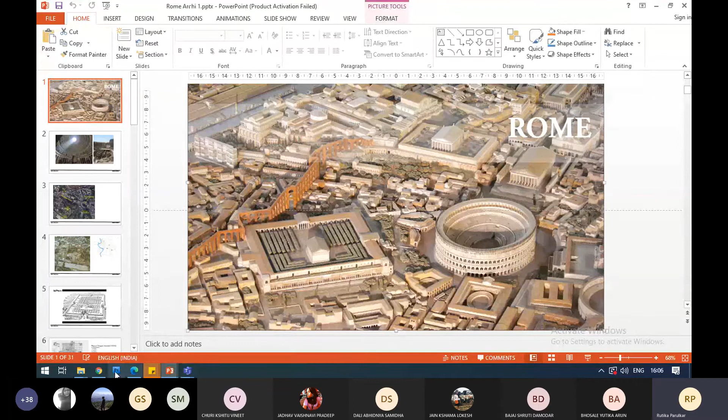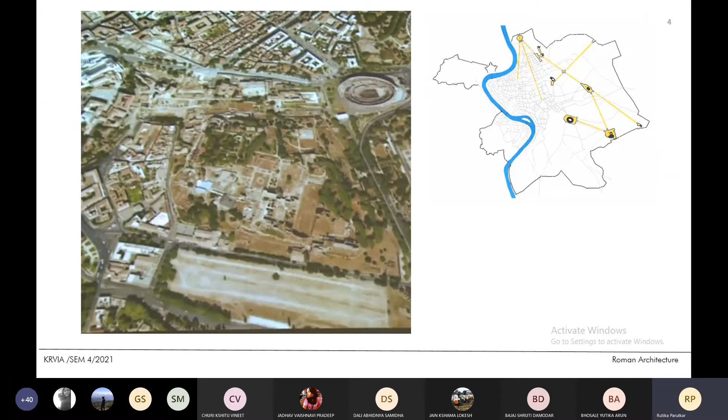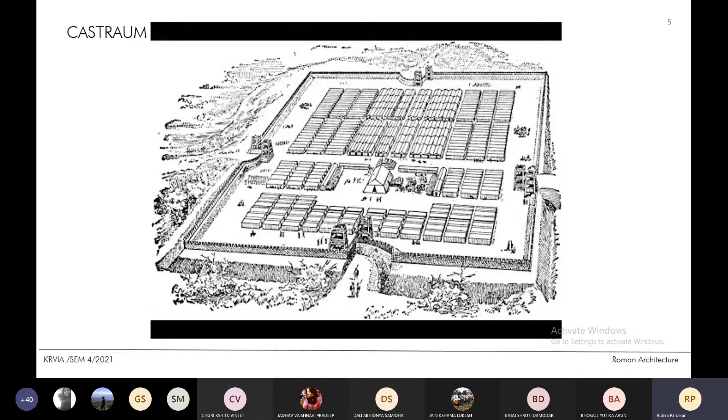So this is what we started last time with Rome. When you say Roman architecture, talk about Rome in general, these are the two monuments that come in front of us. Then we talked about how differently Rome was planned, and these different icons sitting very individually but at the same time syncing with the environment and having their own mark. Plus, one important aspect of the city of Rome is that it is situated on the banks of the Tiber River. Then, the way Roman city planning was, they always had this reference of the military camp they built, called the castrum, which is one of the important aspects—a typical Roman grid plan, and its different aspects.

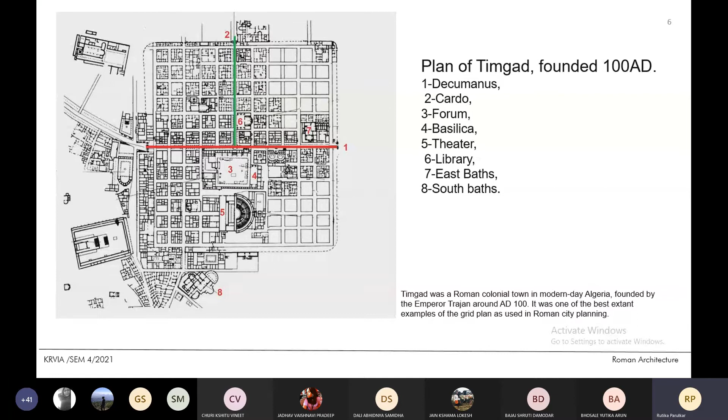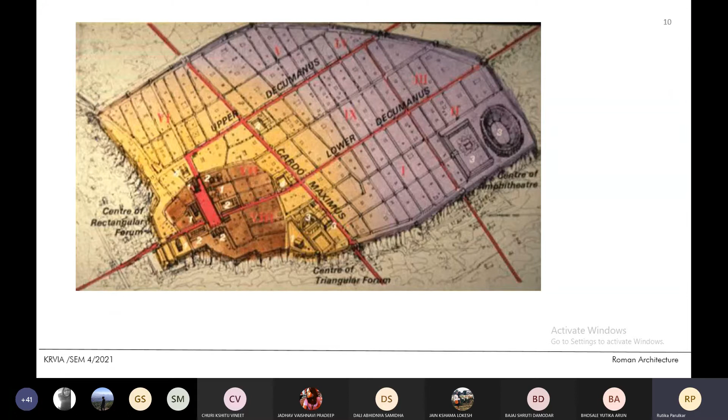Especially the north-south and east-west streets, which are one of the important streets, the Decumanus and the Cardo. Then we saw different examples like Timgad. We spoke about the Roman walls built in the city of Pompeii, and how Pompeii was one of the very important cities, which also showcased the way of life, still preserved. But the only thing that happened with it was the volcanic eruption, and that's how the whole city was buried. Then we also spoke about a very important port on the mouth of the river, that is Ostia.

Ostia had a very different planning aspect, and it reflected the luxurious way of living, because it was fully occupied by traders and businessmen there. Then, we know that Rome was built on these 7 hills, and there are different buildings, or rather forums, built between these 7 hills. Even for a particular forum, one of the hills was scooped out, and a whole way was made to access that forum. Then, the myth of the founding of Rome.

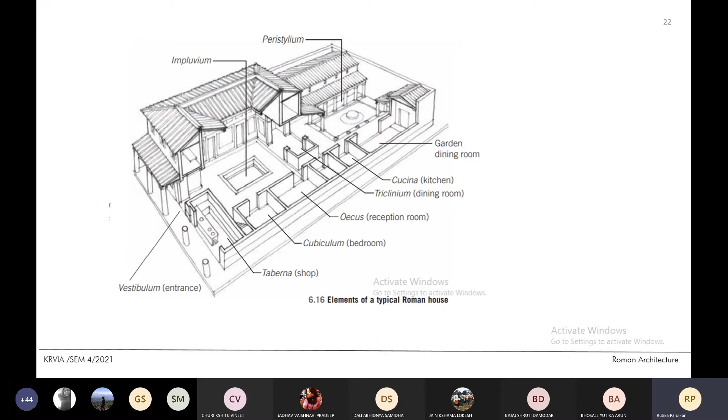We discussed the Iron Age village on the hill and how it was constructed, the typical residential fabric of the city, and how Roman houses were blown up in scale compared to Greek houses because of different aspects of social life. We also spoke about Augustus, one of the first emperors, and the different Vitruvian design aspects of Firmitas, Utilitas, and Venustas, which are important concepts discussed in the architecture of this antiquity.

Taking this forward, one important aspect after discussing city planning is why these monuments were so ostentatious and powerful that they were able to build them. Primarily, they had all the paraphernalia to build a building, but the question was how to take it to another scale, another level. So the Romans worked on the technology front, the engineering front, and experimented with materials. That's how there was a difference in perception of space and the built environment between Greek and Roman architects.

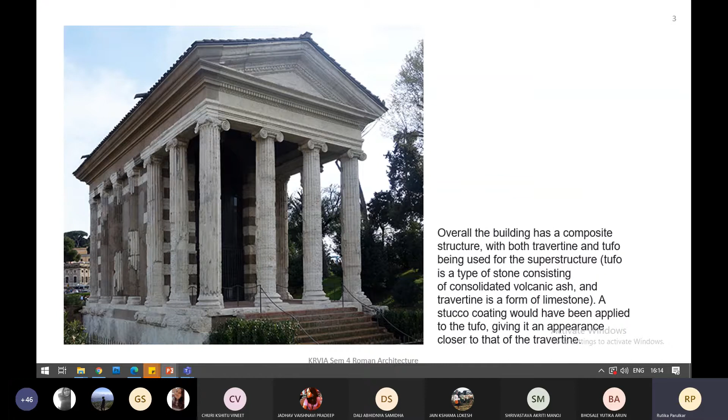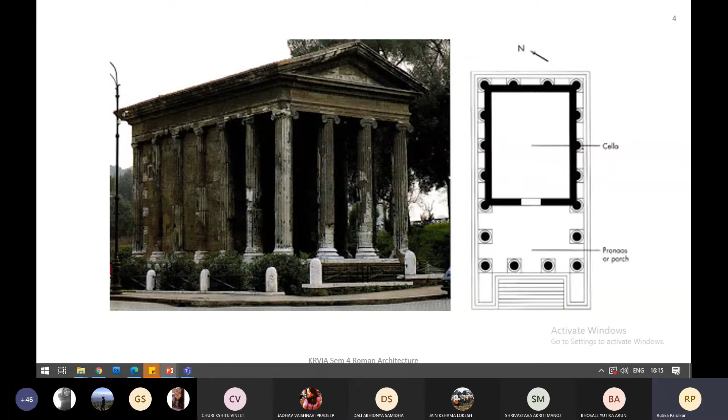This was again a very typical rectangular plan with a series of columns, a wall, and a porch - nothing much different from the Greek temples, and of course you can see the Ionic columns were used differently.

So there were these freestanding columns, then the engaged, or what we call attached columns, and a very humble kind of structure. We're talking about this because it's one of the well preserved structures, one of the very few well preserved structures of traditional Roman architecture. As I said, the monuments in Rome are so layered, with the whole Renaissance, then even Romanesque layers of different eras already on Rome. Once you start studying it, you have to delayer all this to kind of reach this.

So that was one of the starting points of when the Romans started using concrete, and they started experimenting with it.

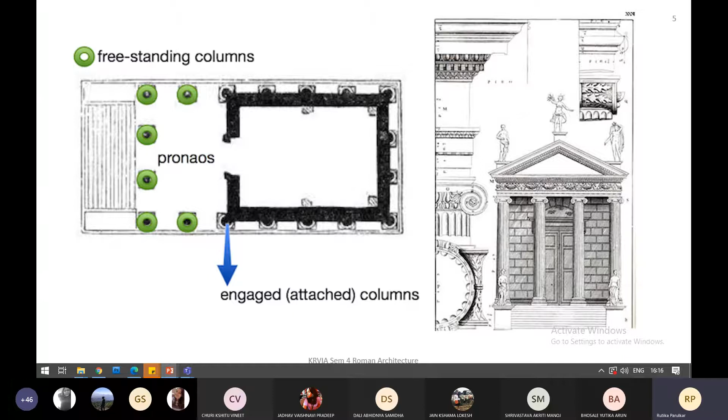Then another was the Temple of Fortuna, which I think is a very interesting temple. Rather than the tectonic aspect, of course we can see the concrete walls. So even here the use of concrete started a lot, but it has not made much contribution to the tectonic or engineering aspects of Roman architecture.

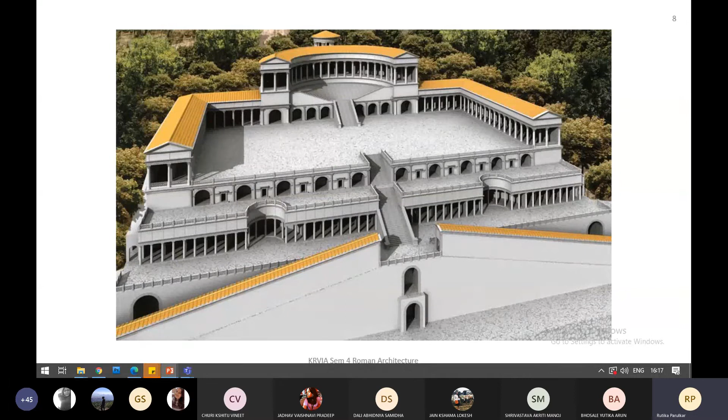But I like this example by the way it responds to the whole setting. I've included it only because I love the way the temple is laid on this heavily sloped land, and the way the terraces are imagined and respond to each other, the colonnades that come up, the flight of stairs that goes up, the scale of the stairs, and the way it reaches the temple as one of the axial points.

So there's a combination of Ionic, Doric and Corinthian columns. I think on the first layer of the terrace you have a series of Corinthian columns, and as you go down, it's more subtle columns used, that is Doric, then Ionic, then Corinthian, something like that. But the way it situates itself over this heavily contoured land, and the way the movement is carved out, is very beautiful.

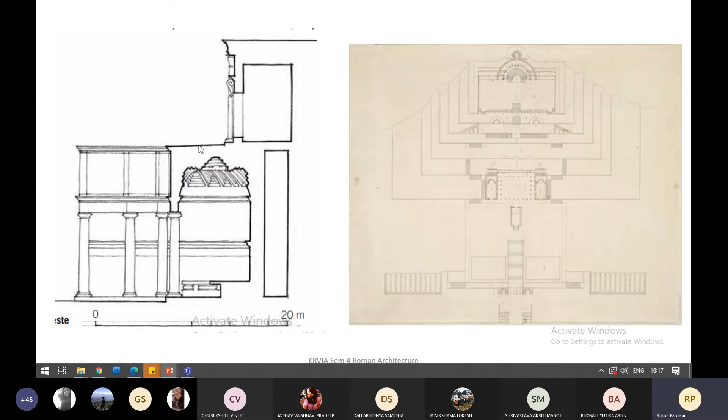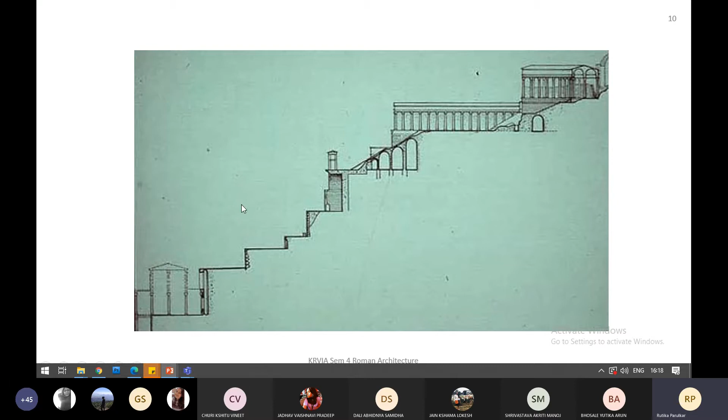This is a part section of it, through one of the terraces, and you can see how the scales and proportions are imagined and matched. This is the typical section of the whole temple, showing how these terraces are formed, and how the structure looks like it belongs to that landscape.

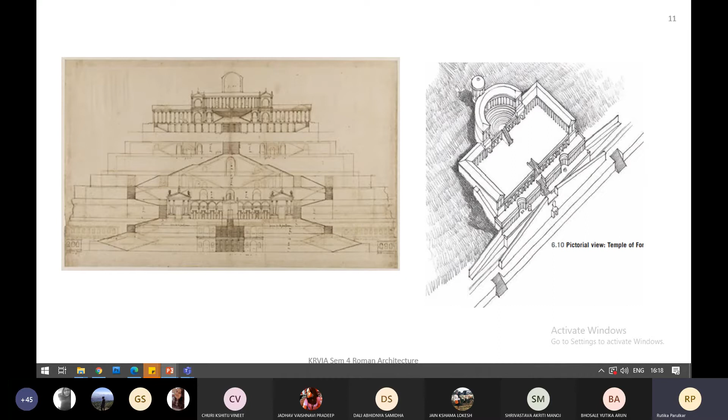That was something really fascinating for me in this. And at the same time, when you see it in elevation, it makes its own mark, its own presence. There's something with these ramps, with the staircase, making not a subtle but a very strong statement. So the way it looks in section and the way it looks in elevation has a very different connotation, and that's what I love about this example, that's why I've included it.

So there are these pointers that I have marked here, and we'll go one by one, which will be helpful for you to study. It's a composite of various natural elements that becomes a liquid mass when mixed with water, and eventually hardens into a very strong substance, much stronger than any of its different ingredients. What are the different elements that Roman concrete is a mixture of? It's a mixture of stone rubble, liquid mortar, composed of lime and pozzolana. So pozzolana is one of the very important materials here that changes the whole game.

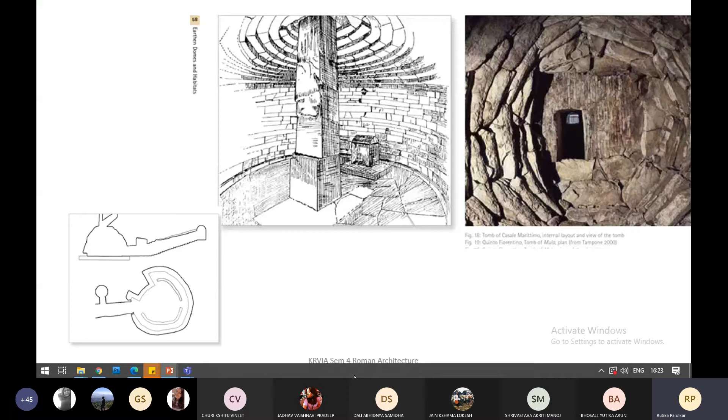So there were these inceptions at the start in which they wanted a departure from the rectangular plans they had. Coming to the different concrete walls we talked about, even when concrete was invented, the only downside of using concrete was that it was not as aesthetic as stone. It never gave the whole textured, visual aesthetic that stone gave.

So what they did was start making different patterns on the concrete when it was wet. Plus, one has to protect concrete from getting moist, or there has to be some kind of layer over it. These were the realizations they had over time, and therefore they developed these different types of wall treatments.

There are three different ways they developed to have different textures on a wall, wherein they had the textures of those stones, which when the concrete is wet and moist, they used to make patterns by those, or make different shapes at the corners of the walls.

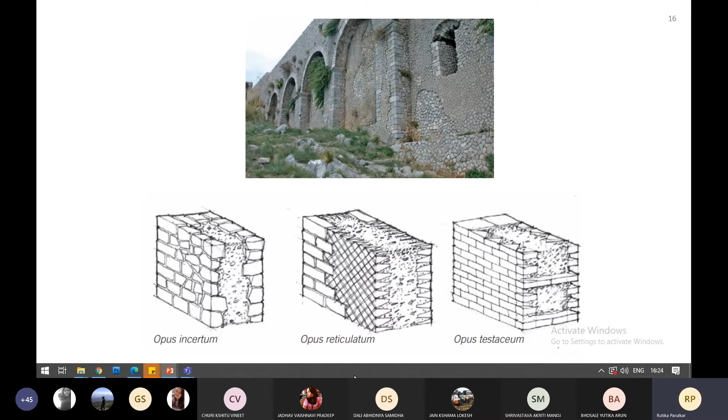If you can see the second option, the reticulatum - here they also realized that the ends of the wall, when the concrete was moist, could be made very sharp by shaping stone patterns into it. It also added support and strength to it. So they started making these smaller changes and tweaks.

After this invention, of course, we know the Pantheon - one of the important buildings and a structural marvel - is all possible because of the invention of concrete. Another important factor was the ruler, the emperors during that time. Hadrian and Trajan were two emperors who were very much interested in the architecture aspect.

There's a whole idea that a lot of buildings that are commissioned, a lot of architecture that is built, are many times an aspect of power, to portray power, to portray identity, and to make one's mark. So it's very important for any commissioned artwork or building to have a patron. Here the patron was Hadrian, and he was very much interested in public and civic architecture. This was one of the important buildings that he commissioned, successfully built through his ambition.

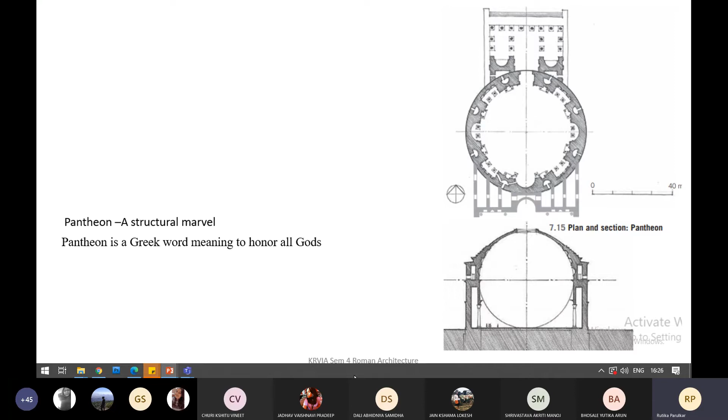And so Pantheon, which is a Greek word, means to honor all the gods. It was a temple wherein there was not the presence of just one god but different gods. This is one of the marvels which is said to be angelic, not human design - this is what Michelangelo said, as we all know. There was this whole trend where historians and artists used to always go back and refer to history and study and document these. So when Michelangelo visited the Pantheon, he was in awe, and this is what he said.

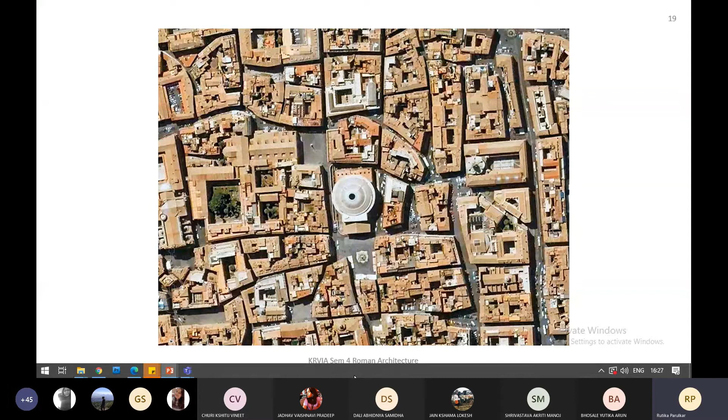This is how the Pantheon sits in the Roman built fabric. The modern day level of the roads is quite up, but if one goes and sees, the plinth and the way the Pantheon sits, it's almost 1 to 2 meters down from the modern height of the road.

One of the biggest achievements they had here was to make a circular plan of this scale. And even the niches that we see here are also one of the realizations where, where there is no load, the material can be removed. So these niches are dual functional, functioning in two ways.

One is because you don't need material there, because the load is not acting there - the material has been scooped out. And second, these niches become spaces where the sculptures of different gods are also kept.

But at the same time, they are positioned in such a way that the oculus at the top of the dome, with respect to the movement of the sun, the way the light falls at different times of day, it actually falls on these niches, on each sculpture of that god. And of course it has its own significance, and that's why these different gods are placed at different niches.

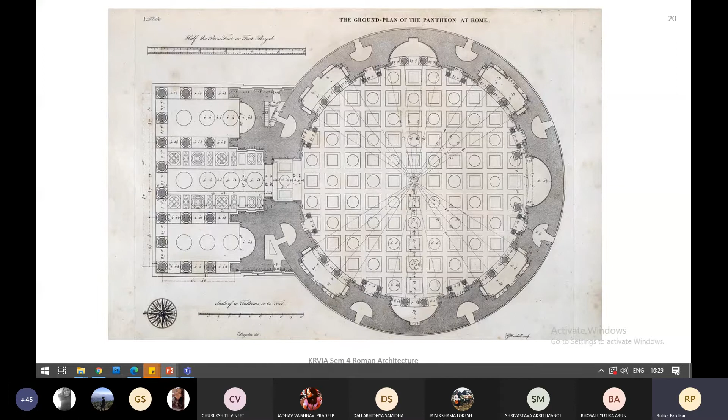So if you remember, this whole aspect - they have still grown structurally and tectonically. They have not forgotten the whole aspect that the Greeks also had derived with respect to space and with respect to experience.

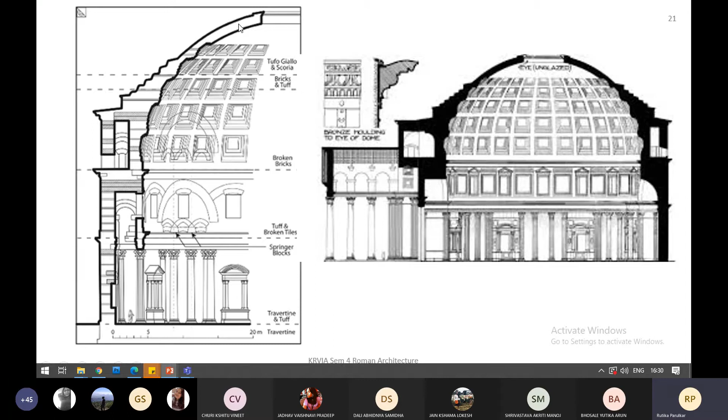Another very logical thing they did was to make an oculus here, that is to just cut out the whole upper part. So at the same time it relieves you from the load, and also gives rise to a very beautiful architectural element which we call an oculus. So you can see in the section, of course geometry was also one of the important parts which they learned and derived from the Greeks.

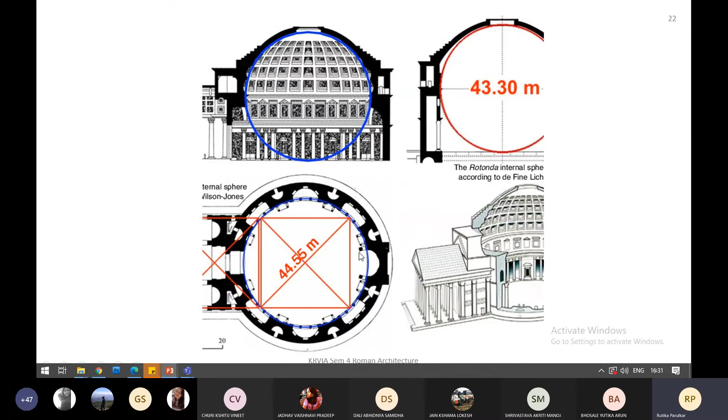In the section, if you see, it's a perfect sphere, and the diameter is almost 44.55. Of course these numbers are a little bit in debate, but it is said that this diameter here and here is the same - you can see there are always these tweak differences, but you can say that 45 and 45 are the diameters, and the height also.

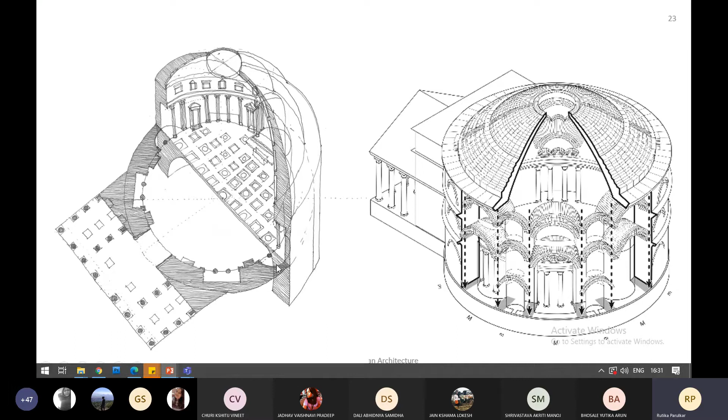These are some sections which are self-explanatory. One thing to note is that these columns don't contribute much to the load transfer. The only thing they contribute to is this small niche that is happening here, but the main load is taken by these massive walls which are built.

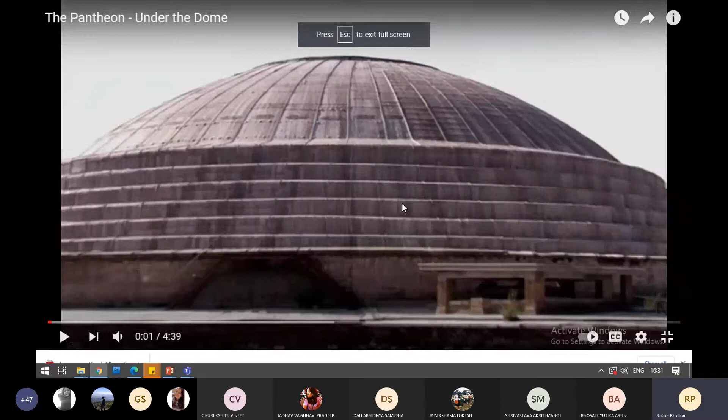There's a very interesting clip that I think will be easier for you to understand. Just let me know if you can listen to the volume.

Yes, hello. Yeah, so that's how this wonder of a non-reinforced dome is. And of course later, as it is said, until the construction of Brunelleschi's dome in Florence, this remains one of the amazing engineering marvels.

So again, one of the important experimentations - if you notice this intuition, this realization that the load has to be lesser on the upper part, therefore you use a combination of stones, but the kind of mixture and concept remains the same. The way the concrete acts remains the same. These intuitions, these experimentations were something that made Roman technology and revolution very important.

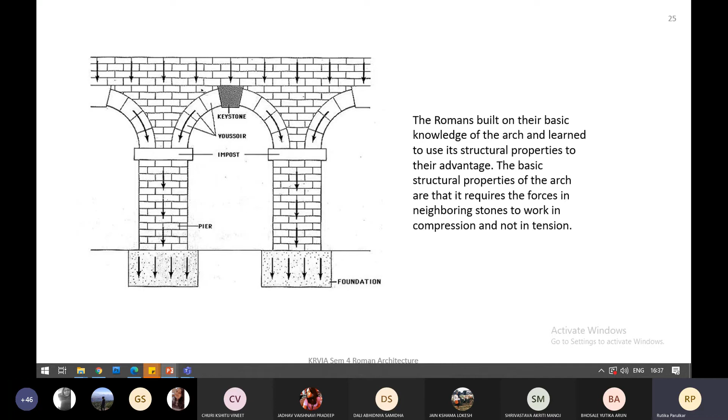So they had their basic knowledge of arches, but now how to take that to a different level was something they wanted, and they proposed it. The basic structural properties of the arch required - the forces of the neighboring stones to work - all these things were always taken care of.

One of the important elements of Roman technology was speed. The Roman Empire was growing humongously, and political will, making one's mark, was also one aspect that architecture has. Architecture is also a way one shows power, and that's how each emperor, when he came, wanted to build his mark.

There was a very common practice wherein these arches of triumph were built, and these Roman arches are like massive structures which still exist. They were a mark of where they won a war, and that's when they built these different arches. There were also different columns that each emperor made in whatever forum they commissioned.

As I said, an important element of Roman technology was speed, as the empire was continuously building new things. The arch is perfect for this, since by design it doesn't require as much material as a wall. This means less material, less time for construction, and less labor and less cost. This was one of the important aspects.

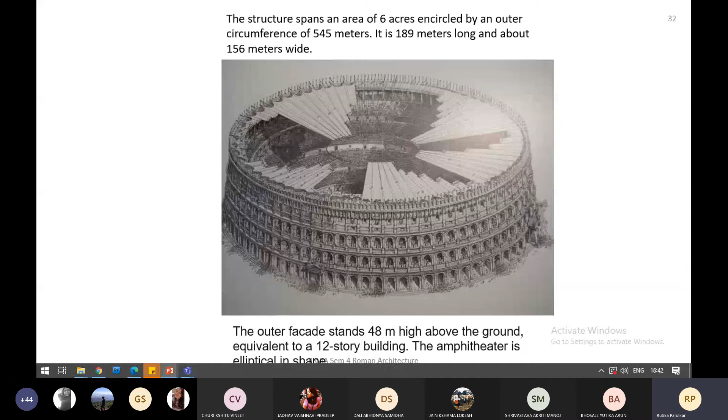It's 189 meters long and about 156 meters wide. It is almost 48 meters high. So you can imagine, it's like 12 stories. That's what it is - you can actually imagine the whole grandeur of this amphitheater.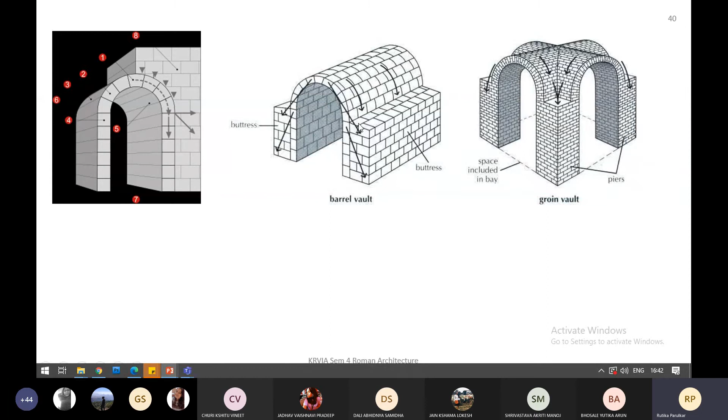These massive arches which are outside actually convert into walls. So you have arches from both sides, and when both arches come together, they intersect and turn into these groin vaults. You're all familiar with what a groin vault is - two arches, when they intersect, turn into a groin vault, which also reduces the necessity of the supports and buttresses that one has.

These are some interesting pointers you can refer to. There are these different levels, stories here, and at each story different orders were used. There was this whole kind of invention of composite and Tuscan order.

So Tuscan and composite orders were the two orders which - composite is not like one of the numbered orders, but the Romans used it extensively. Composite is a combination of Corinthian and Ionic. Tuscan is one of the derivations of the Doric order. The important aspect of Tuscan is that the flutes which are there in the columns are missing.

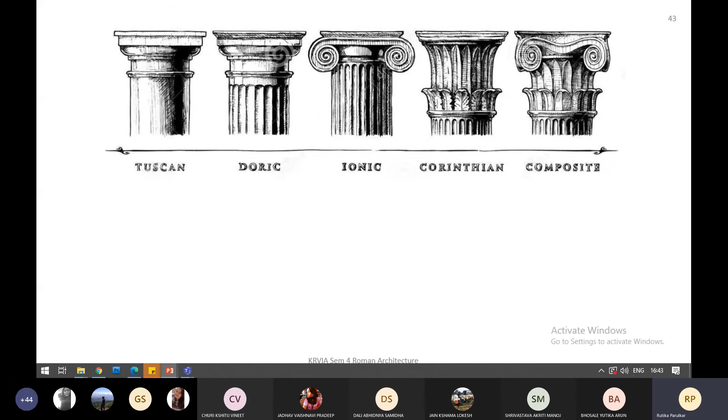This Colosseum has different orders used at different levels. One of the most prominent features of the building is columns and arches. The first story is decorated by the Tuscan order. The second is by Ionian columns, and the third one is by Corinthian style columns.

The fourth story of the Colosseum is mainly decorated by pilasters. It doesn't have these arches and voids there - they are majorly pilasters. This is almost a 20 feet wall, and from the outer side you can see the decoration. If you see here, there are these small columns jutting out, which are called pilasters. They don't act like a column though.

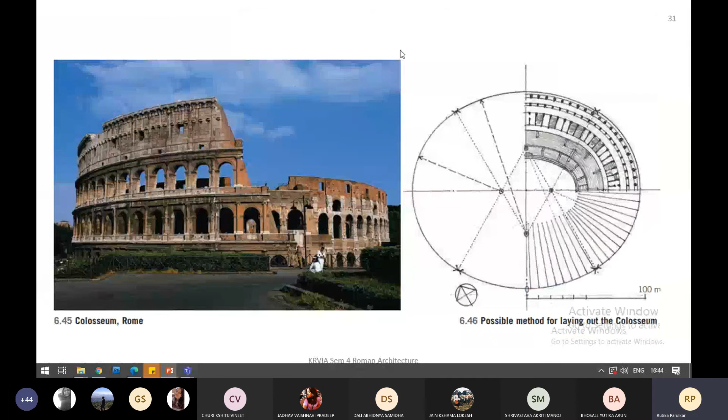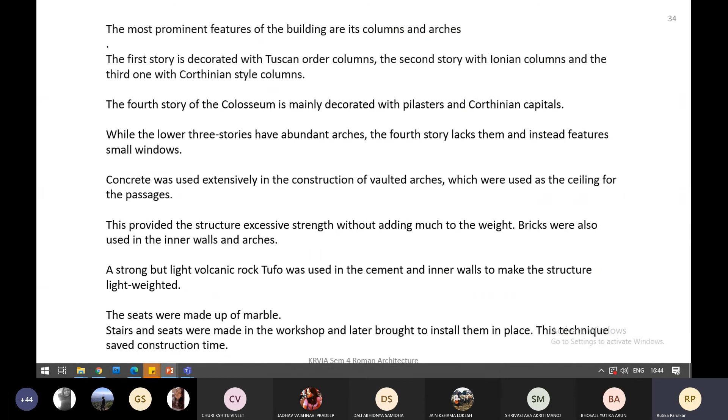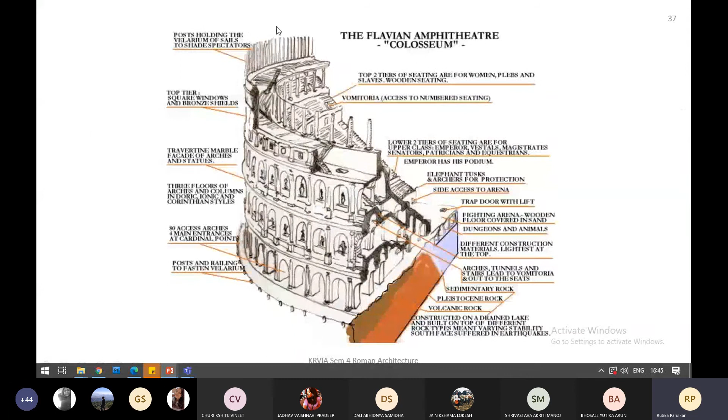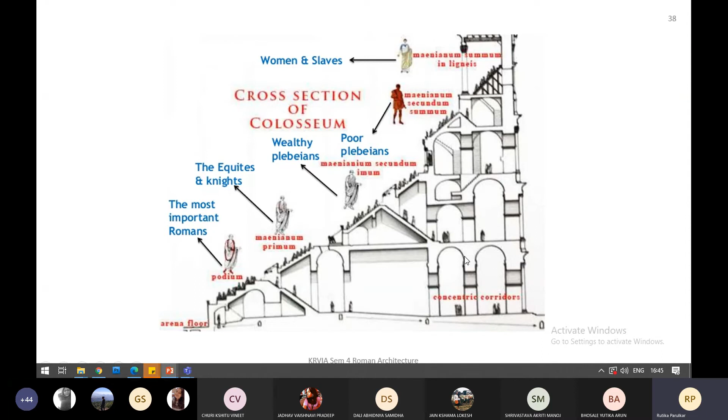Concrete was used extensively in the construction of vaulted arches, which were used as ceilings for different passages. So you can see the section - these were basically the passages to move in and come through these doors and sit into your seat. There was this hierarchy wherein people would sit where and how they would come there. In this section you can see how one accesses different levels through this very interesting staggered section, and how these arches flow, running perpendicularly to each other to create these beautiful vaulted passages which still exist very strongly.

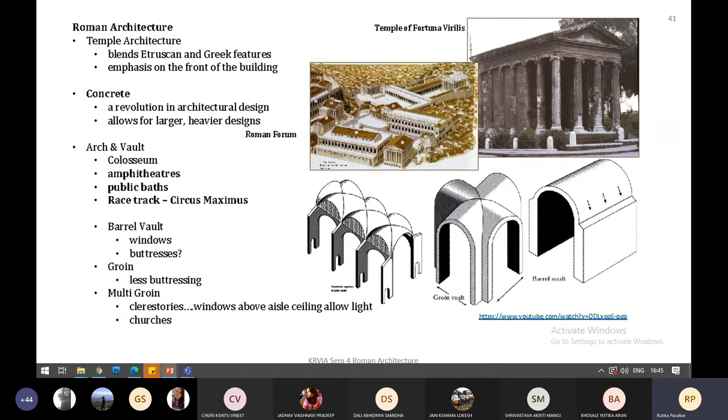These are again some of the pointers that you can refer to - this is the smaller, these are the different levels at which the different orders are used.

Another important invention was the carrying of water and water supply, through water channels. The only thing was that these water channels relied on gravity, and therefore had to be placed on height. Of course, they had already mastered the whole engineering of arches, and that's how they could build these massive series of arches over which the channels are placed.

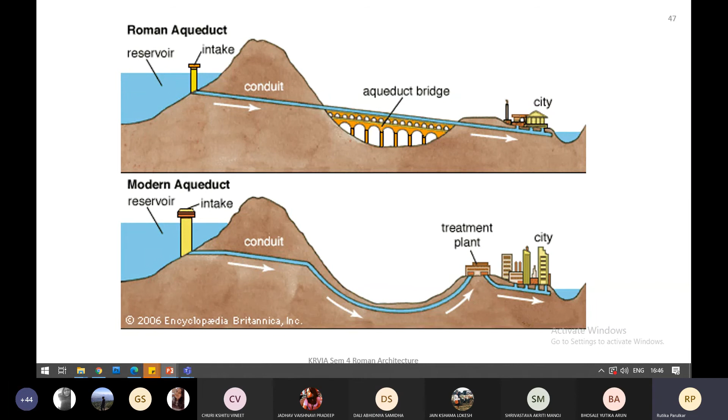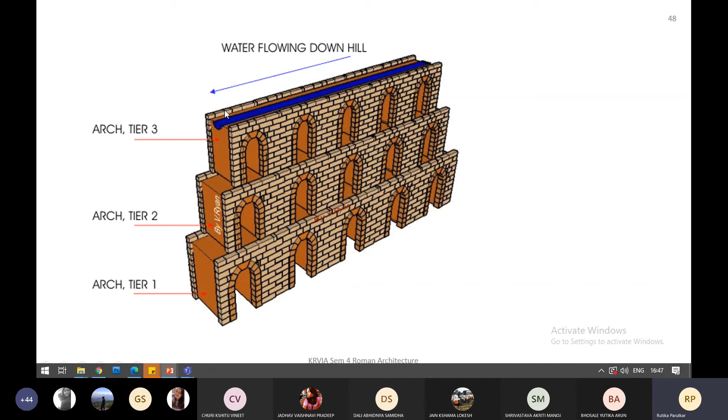Through that channel, water is transported to different parts of the Roman Empire, not only Rome but different parts of Europe. That's how the whole engineering happens. There are different levels with respect to length and height, different combinations were used, and as the length increases, the height also increases or decreases with respect to the terrain. Of course, the basic construct of the arch is used here.

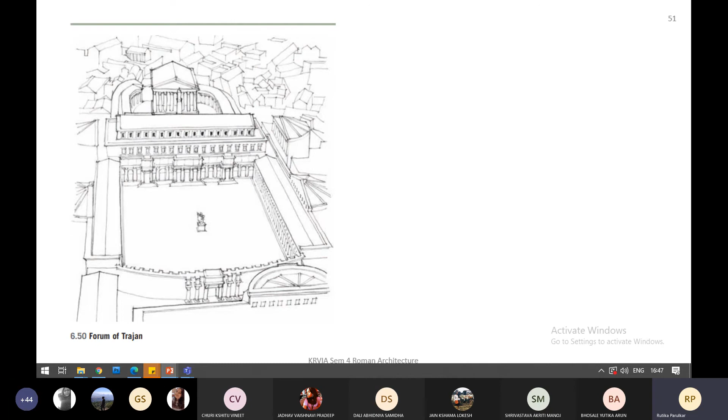Forums were also one of the important buildings of civic architecture. It was an open space that each emperor commissioned or built, and around that open space you had different buildings. The Forum of Trajan is said to be one of the important ones because it's a big forum, surrounded by different buildings of court or legal activities. There are markets, and that's how the whole open space is crafted, with the edges of the open space utilized and planned.

The interesting thing is, as I said, every emperor came and built his forum. That's how in imperial Rome you can see this series of forums sitting together, and consciously built beside each other, very effortlessly, each one sitting beside the other.

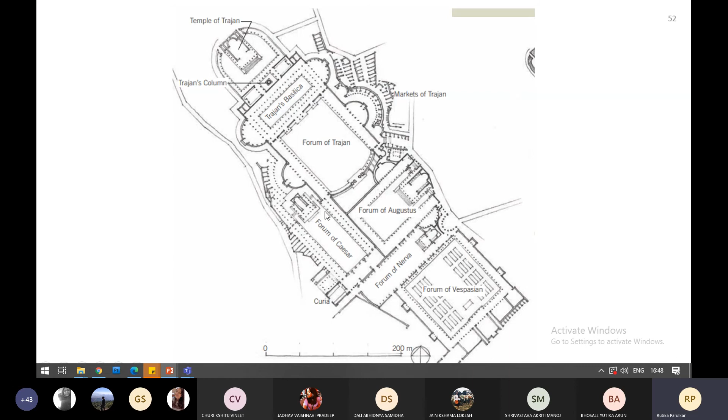Trajan wanted to build a big forum here, and there was a hill existing, so the architect was told to demolish that hill and make a way out to access this forum. That's a very interesting part of the forum. This is one of the imaginations that an artist has made for that.

A temple was one of the important parts of the forum, and the other buildings were majorly of legal attributes, and even a market, as one of the important relationships in this design.

Rather than talking about the other aspects of columns and whatever, I want to talk about the whole design aspect - the proportions, it looks like a very planned campus. Even considering these series of courts, the way they respond to each other - but the fact is they were all built at very different times, almost 100 years apart from each other.

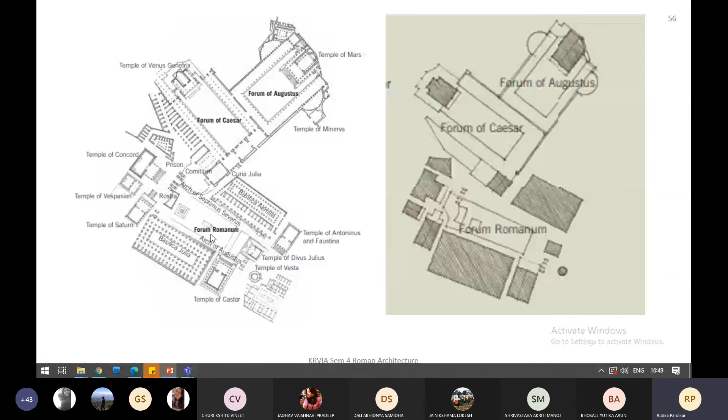So the Forum of Augustus Caesar, Forum Romanum, and then comes the Forum of Trajan. This is how it continues the whole imperial fora.

Then you have the Pantheon, the Imperial Forums, Nero's Palace, and the Colosseum. This is the Palatine Hill, one of the hills that remains, and this is the river. So these were all important aspects.

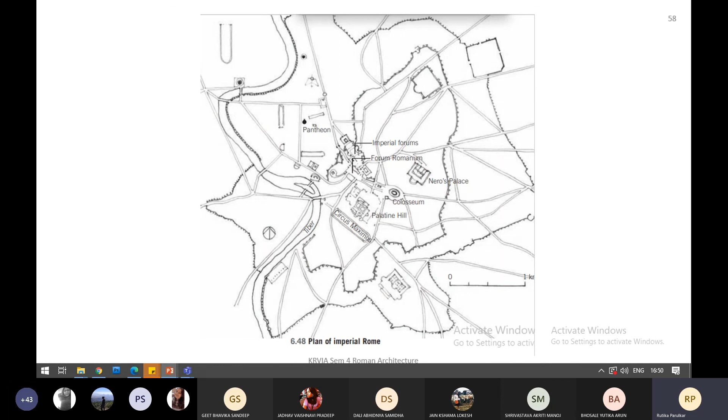There are a lot of things we couldn't cover, but these were the main things that sum up this part of Roman architecture that we were trying to study.